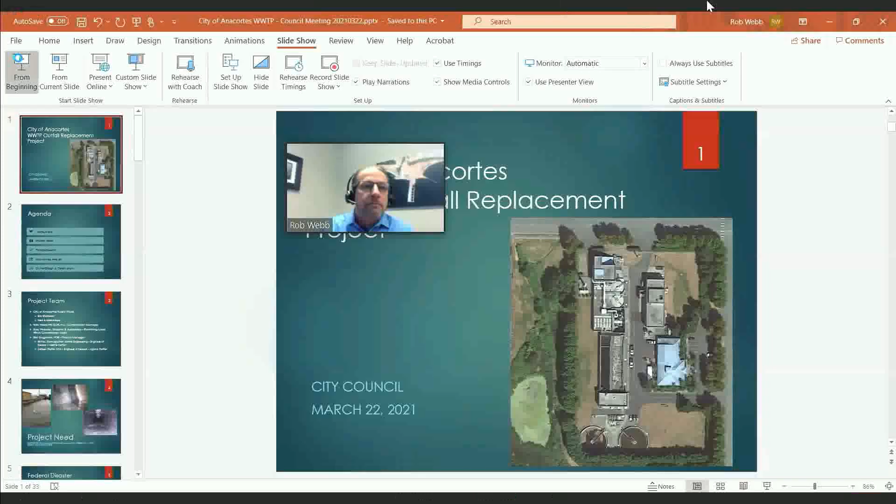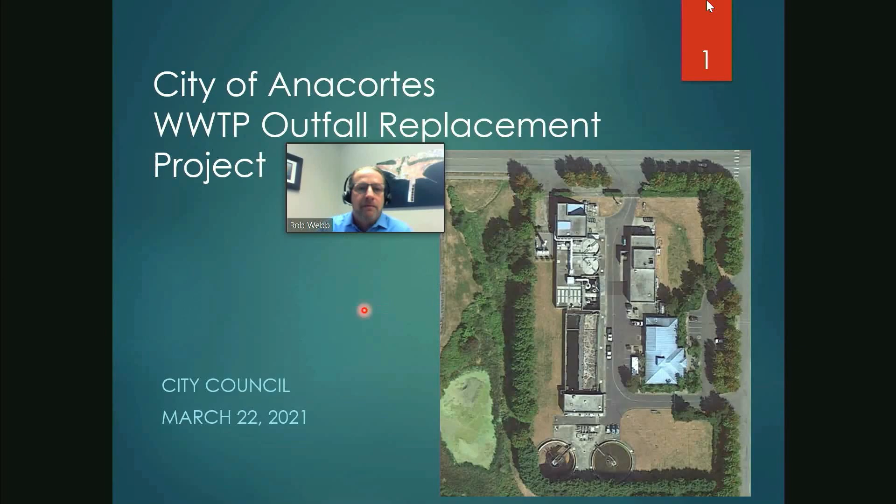Can everybody see my slide okay? Yes. Okay, so this is slide 1, just an overview slide showing the wastewater treatment plant. So, agenda for tonight: go over a bit more introductions of the project team, go into the project need, why we're here, why we're doing this, speak to the federal disaster declaration that overarches the project, go through the alternatives analysis briefly, and then get into some of the particulars of the outfall design and construction.

As far as the project team, you all know Fred and Eric, Rob Webb, and the rest of the city team. That includes Ross Widener of Widener and Associates, doing all the permitting, FEMA coordination, and a large variety of permits for the shoreline demo work. We consistently need a large slew of federal, state, and local permits. Our actual design team is headed up by Eric Bergstrom over at HDR, the project manager, supported by two engineers: Bill Fox from Cosmopolitan Marine Engineering, responsible for the marine portion of the design, and Colleen Patilla at HDR, the engineer of record for the upland portion of the project.

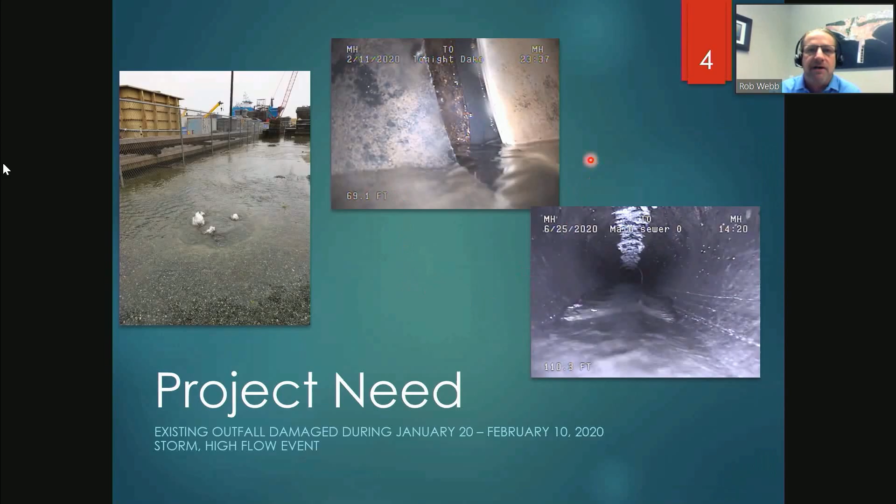In terms of the project need, this is being driven by a high flow storm event back in 2020 that caused water to come up into the streets via the manhole. A subsequent inspection of the existing outfall showed a gap in the outfall pipe and what appeared to be a vertical discontinuity in the invert, or bottom of the pipe, as the little wheeled camera went down the pipeline, dropped suddenly, and continued on. It seems there's damage to the outfall pipe, and so the project begins there, to correct that damage from the high flow event.

This storm event was declared a federal disaster by FEMA, project number 4539DR, affecting various counties within the state of Washington.

That disaster declaration brings in certain federal protocols and opportunities. One is that the project is eligible for FEMA funding, and so far it's been approved for reimbursement of the emergency work, with an initial funding level approved and additional levels pending based on additional project details. Ross Widener is coordinating that.

We also get benefits for permitting, in that some of the activities are already streamlined and pre-negotiated, so we don't have to go through all the various technical details. Those give us significant advantage because they reduce the permitting time and complications we would otherwise encounter.

As part of the project, a full alternatives analysis was conducted by HDR to look at various potential routings of the outfall pipeline. These were rated based on a number of evaluation criteria, one of which was the ability to get the outfall constructed this year in 2021, as opposed to waiting a full year.

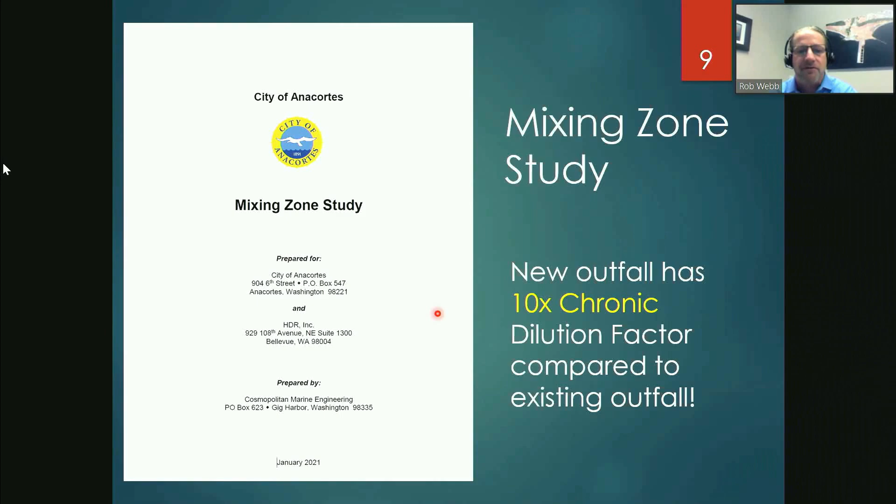That evaluation summary went through the various 5 routing alternatives, looked at the factors I mentioned, and evaluated their potential impacts on the project. We also looked at the length of the outfall, which varies depending on the course, because they all start and end at the same point, but their intermediate routing affects the total length. All of these are constructible, but have various levels of complications. The port has been supportive throughout the entire process, giving us input on how their operations and the outfall might interact now and in the future.

We also looked at costs for construction. When we look at the costs for construction, alternative E is the lowest cost. It also had the lowest number of impacts on that previous table. And so from that, we come out with a preferred alignment E.

It does not require construction on port property. It gives us our highest probability of starting construction in 2021 as we're planning. It avoids that dredge area. It allows cut and cover construction in both the uplands and the marine area, because we did consider tunnel boring, but it was more expensive and more technically difficult than conventional cut and cover for both the uplands and the marine.

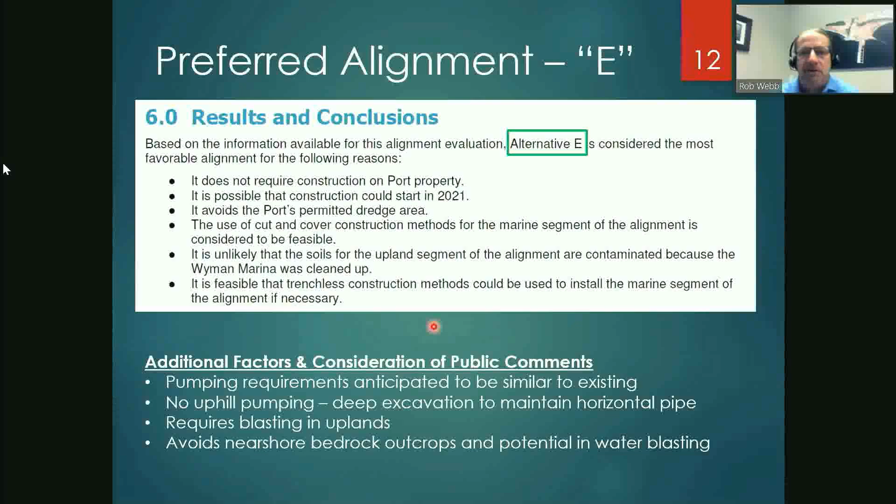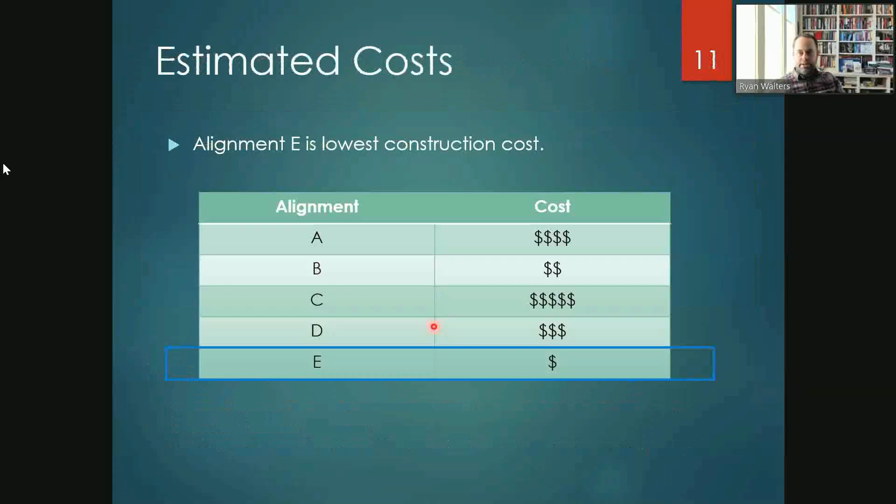Yes, Mr. Walters. Back a couple of slides, the last cell in the table, slide 10, seemed to indicate there was some unresolved question about alternative E. Have we now determined the depth of the rock along the alignment? Yes, sir, we have. We have done a full investigation of that. We are quite comfortable with the depth of the rock along the alignment, and we also have done rock coring to establish the strength of the rock. Okay, thank you. Yes, no worries.

There's a lot on this slide. Is there any other questions?

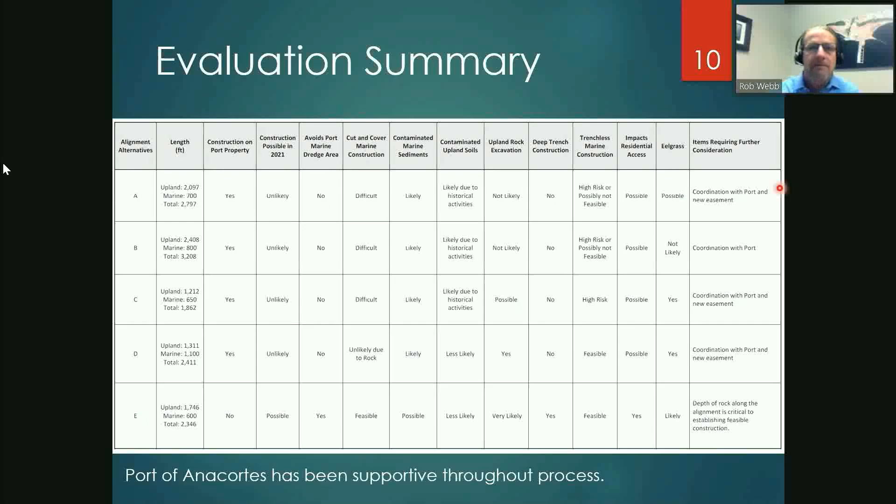As far as pumping requirements, this is for us technical geeks, I just got to put this out there. In terms of our existing outfall, it's a relatively small pipe. It's been repaired, replaced, and other things over time, and as a result it is a rather small diameter pipe, down as small as 18 inches along some of its current alignment. That, as you can imagine, causes restrictions - it's a small straw, if you will.

To get out the full plant capacity, or typical top end that we talk about of 10 million gallons per day, it takes 3 pumps running at that flow with a high tide, pumping against 22 feet of total head. When we go to the new outfall, we're going to a much bigger pipe, so now you're sucking your milk through a much bigger straw - it's much easier to move the fluid, there's much less resistance. So we wind up with a reduced amount of head that we're pressing against, and we should be able to run 2 pumps instead of 3 at the plant. That's because the new outfall, being larger diameter, is more hydraulically efficient. That's my one slide to look like an engineering geek.

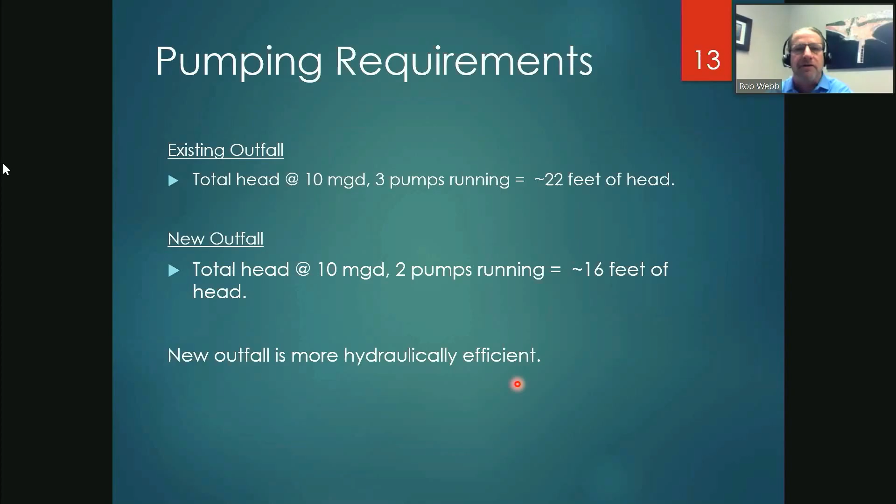In terms of the outfall design and construction itself, there are 3 components or projects that build this up. One is the upland portion of the outfall - it goes from the wastewater treatment plant down through the streets and out to the shoreline at the end of U Avenue, where we will then transition to the marine portion that goes from the shoreline out to the end of the outfall in Guemes Channel. There's a third, corresponding project that's not part of this, which is to then, after this outfall is in place and operational, abandon and remove the existing outfall.

When we talk about the marine portion, I'm going to go from offshore to onshore, because that also fits with our current construction and contracting schedule. The in-water portion is more schedule dependent with that limited in-water window. We also have a limited number of marine contractors to perform this work, so we wanted to get the marine portion moving as quickly as we could, to get contractors interested and have a good slate of them provide good quality and value to the city when we get to construction.

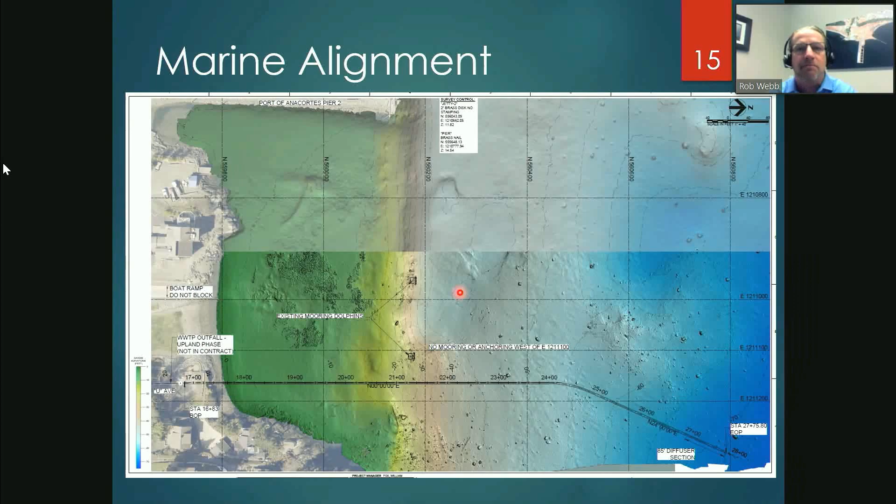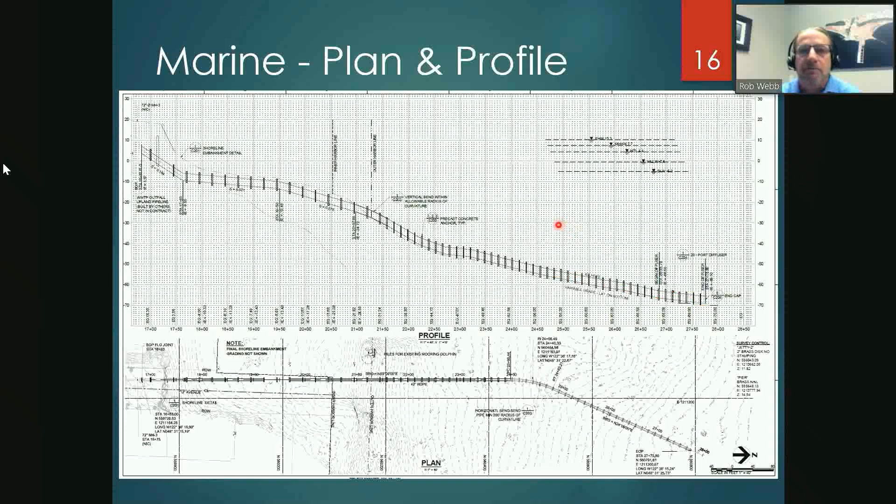A participant asked for the depth at the start on the left side and where it ends on the right side of the chart. The speaker explained: this datum is the North American vertical datum, with zero marked here, and the tide range shown nearby. At the far end, we're down around negative 60 feet below zero, so about 60 feet of water depth. On the left-hand side, we're above sea level, about elevation plus 18 at the top of the ground. Our pipe is 4-foot diameter, with its bottom around elevation 4 and top around elevation 8.

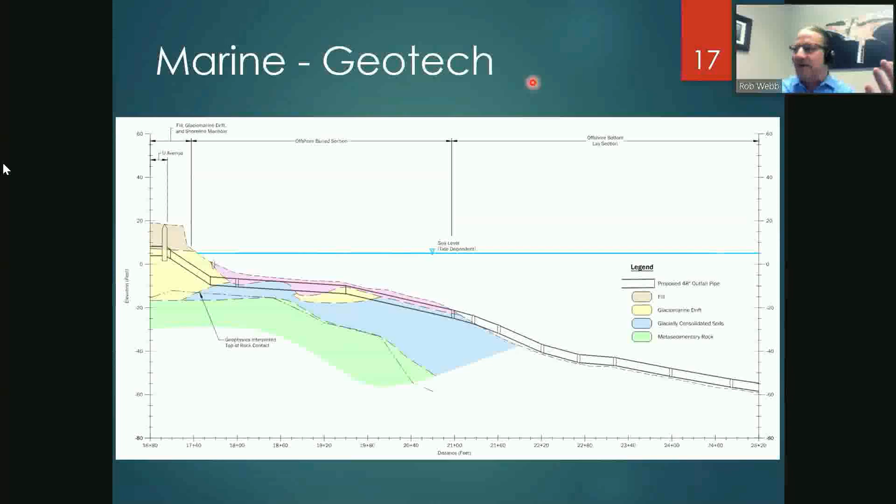For the marine construction, we're talking floating plant, floating cranes, tugboats, divers, and support equipment. We're putting in about 1,000 lineal feet of 42-inch diameter HDPE, high density polyethylene, plastic pipe. It will be held in place by concrete anchors, about 7,600 pounds apiece, with 64 of them attached to the pipe. The pipe will be trucked in near the site, contractor's choice, then fused together - basically melted and stuck together. The anchors, which come in two pieces, will be clamped onto the pipe, all done at an off-site location.

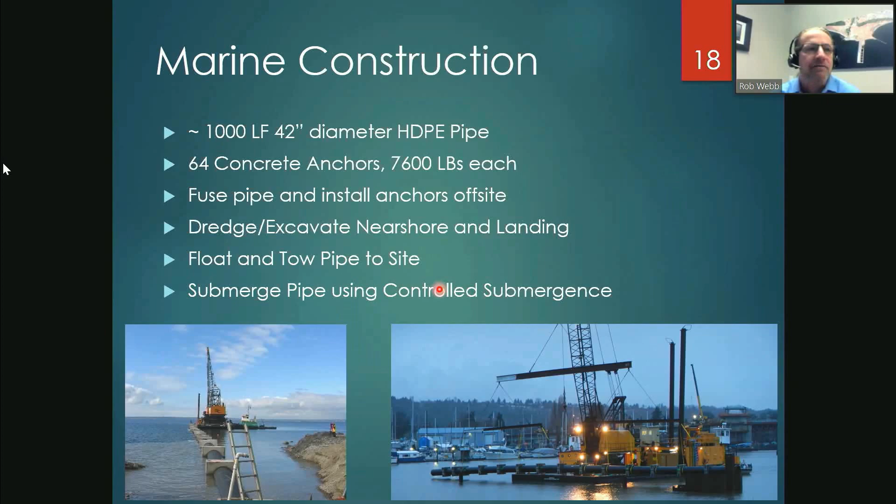The contractor will simultaneously be dredging and excavating the nearshore area and the landing - the nearshore area is where the pipe gets buried, and the landing is where it comes up onto shore. Once that's ready, they'll float and tow the pipe from where it was assembled over to the site. Once there, they'll submerge it using a technique called controlled submergence, pumping water into one end of the pipe, bleeding air out the other, and sequentially sinking the pipe along its length.

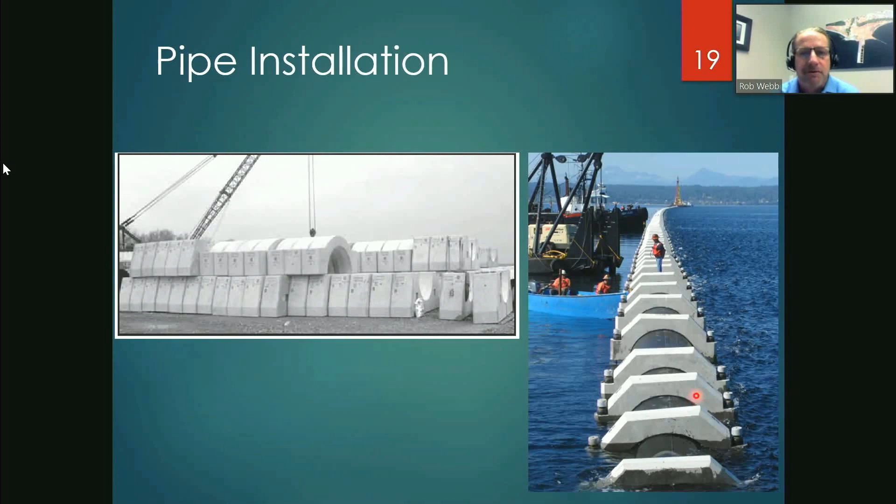In the near shore area, the contractor will come in and put in steel sheet pile shoring to create a landing area where they can dredge out in between it and have a notch coming into the upland area to lay the pipe. They will put in the sheet pile, do the dredging, and then tow that assembled pipe, with all its weights in place, out to the site.

In terms of durations, pipe preparation will all be done off-site, and that'll take some time, as will the precasting. But in terms of actual work the public will see, we're looking at about 2 weeks for upland site preparation to get access ready, and 2 to 3 weeks of work to get the marine portion ready. Then, when the pipeline is ready, we'll tow it over, and in one day it'll go from floating to sinking, and its installation will be done. Then we'll remove the sheet piling and do some backfilling on top of the pipe in the marine area, which is probably another week. So the actual physical construction of the marine piece, in the public eye, is relatively short.

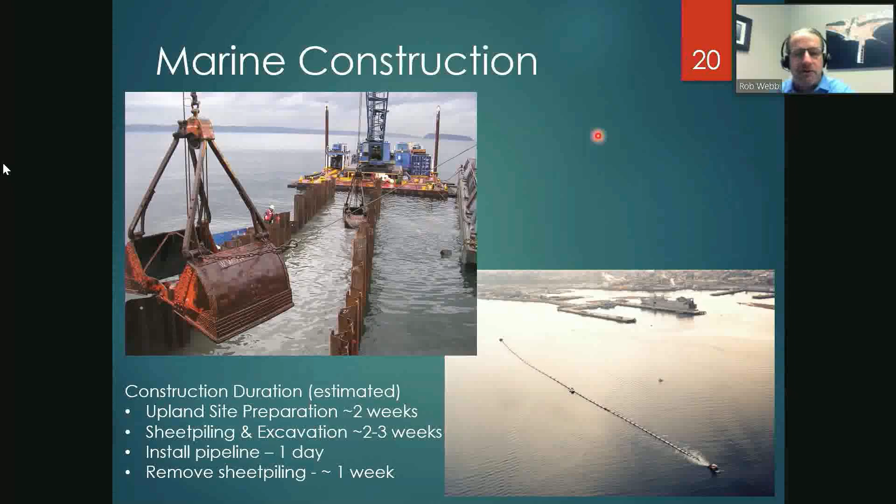The way this works is when the pipeline initially comes in and is floating, it's full of air. The contractor will then hook their crane onto a piece of it some distance from shore and lift it up a little bit to create a portion there that the water cannot get beyond. They then start pumping water into the inshore section, which floods the area between the lifted section and the shoreline, putting weight in the pipe. That then causes the pipe to sink to the bottom.

As they continue pumping water in and venting air out, the pipe, just like a rope as you're laying it down on the floor, will gradually sink down to the bottom along its full length. Then they pull on it with tugboats, both at the end and where we want the curve, to put it down in its proper place on the bottom.

This process can be reversed at any time. Should a problem occur, we just reverse it - let the water come out and pump air back in. We can float the pipeline back up and adjust it if we need to. If we get halfway through and a significant unforeseen storm comes up, it can be managed as necessary.

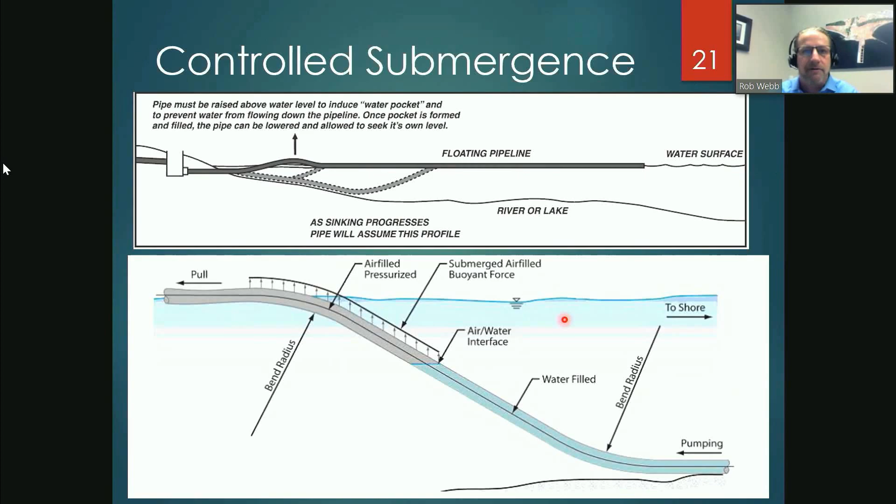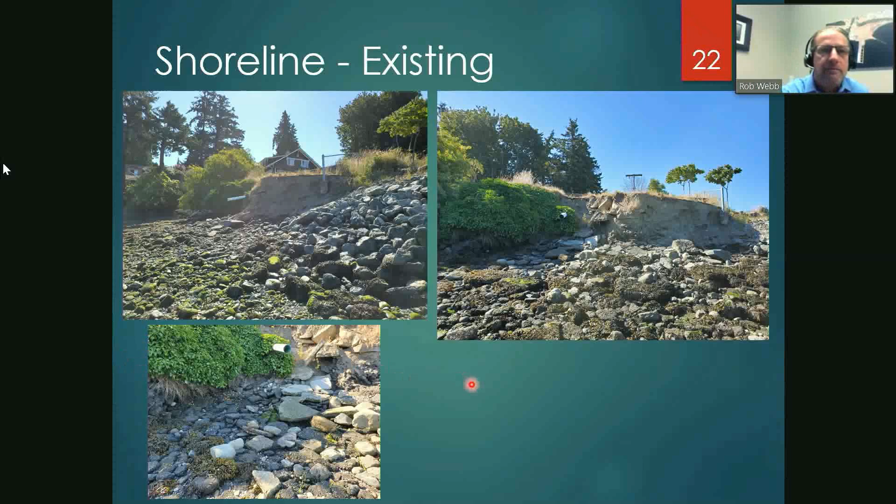Right now, as I mentioned, we are in our contracting mode for the marine work. We're finalizing our 100% design, but due to the limited number of contractors and the limited window, we wanted to get the project out for the contractors to be aware of and get it on their calendar.

Our objectives in the contracting: get the qualified contractor that provides the best value to the city. We're very cognizant of making best use of city funds throughout this process. Want to make sure we have a contractor that is aware and brings that to the table. The RCW that you see here gives us the ability to make this type of selection and do more of a qualification or other type of selection as opposed to low bid alone.

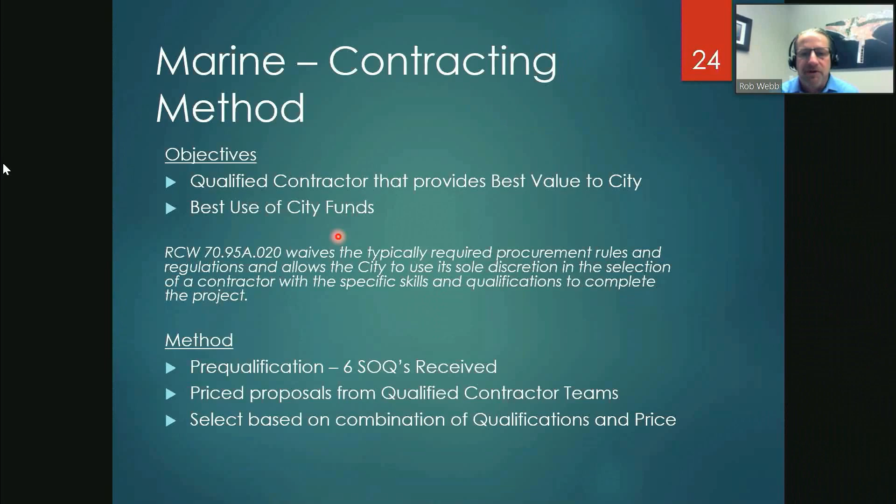This being complex work, technically, permit-wise, environmentally, we really want to make sure we bring the right team to the table to do the work successfully.

Unless anybody had any questions on the marine section that you wanted to jump into now, I'll start talking about the upland alignment and its construction.

So again, when I talk about the uplands, I'm talking roughly about the first 1,700 lineal feet or so of the project, coming from the wastewater treatment plant over and out to the shoreline there. Again, about station 17 plus 0 is where we make the handoff from upland to marine.

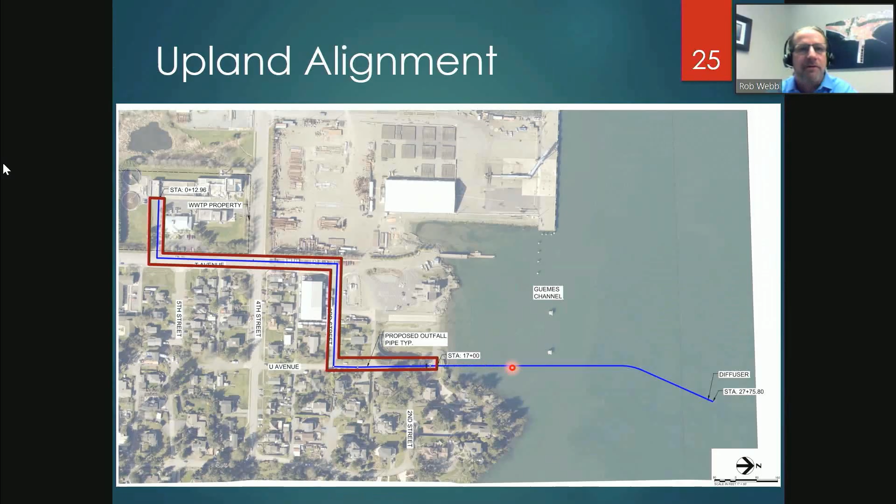When we talk about the upland construction, we've got that 1,700 lineal feet. Here we're using a 48-inch diameter fiberglass reinforced pipe. It's lighter than concrete, more chemically resistant, corrosion resistant, just physically stable over time, lighter. And so that's the pipe choice for the uplands.

To accommodate the construction, 3 manholes will be installed. As I said, this is a cut and cover, so we're digging a trench on the order of 15 to 30 feet deep. We do have about 400 lineal feet of that excavation that will be in rock that will require blasting, but not unheard of in construction, or there in Anacortes itself for construction.

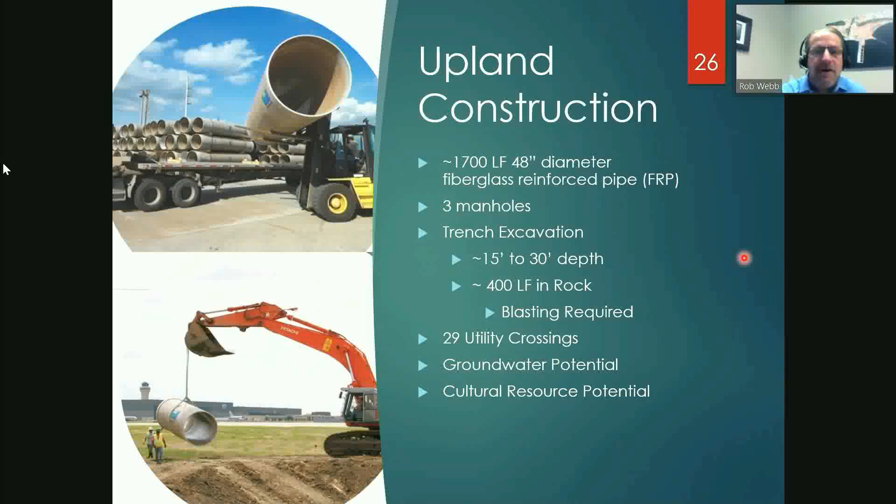Along that alignment, we have 29 known utility crossings of every flavor: water, sewer, power, phone, fiber, you name it, we've got at least one of them. We have a potential for groundwater that we are aware of. There is a wetland behind the wastewater treatment plant, and there is an active dewatering system at the wastewater treatment plant, so we have information on that and are preparing for it. And we do always have the potential for cultural resources, so appropriate monitoring plans are in place for that during the work.

As I mentioned, the uplands is going to be a cut and cover trench, so just a couple of pictures here showing that. We anticipate the contractor will use trench boxes, although they could use an alternate shoring system that is a contractor design. You can see here a typical trench box - this is 2 of them stacked on top of each other. You can stack more of them as necessary to accommodate depth. Those can be put into the excavation as necessary for stabilization and safe work practices.

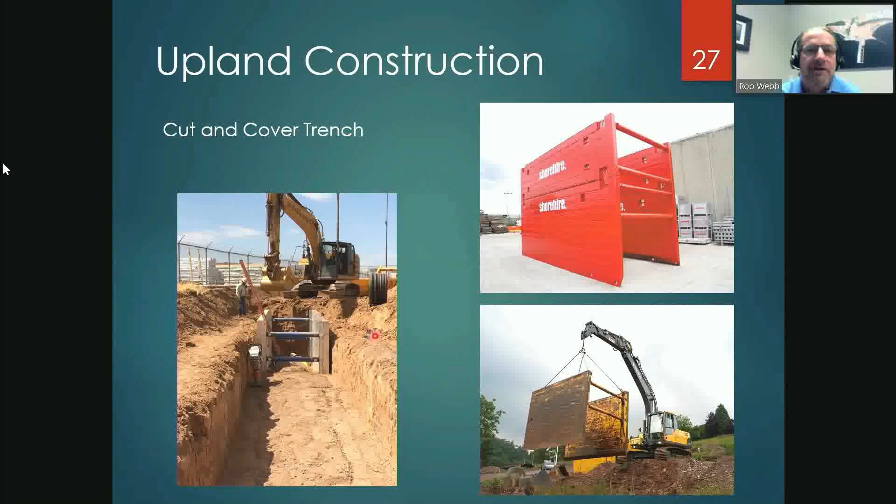Here on the left, you can see an example of that in practice. There's the trench boxes, workers in there making connections between the various segments of pipe. And here you can see the contractor did what's called benching down a little bit, where they excavated a bit on the shoulders of the planned utility trench, so the trench itself wasn't so deep.

Here is our geotech information. Again, we've done considerable investigations on this. Geoengineers is the geotechnical engineer on the project, with considerable experience there in Anacortes. One of the most important factors in selection of a geotechnical engineer is their local knowledge.

And so here is the results of their site investigation. If you can't see it all, the green is rock. Everything that's not green is a fill or a soil material of some type. The brownish color is fill material that is identified as being brought in. The yellow and the blue are glacially deposited and overridden materials, so again, a very dense material is expected. And then here in the green section, you can see where we would be doing the blasting to install the trench.

I have a question about blasting. How deep is that rock from the top of the highest point down to the pipe itself? The ground surface here is about elevation 35, and the bottom of the pipe is around elevation 5, so this is about a 30-foot deep excavation.

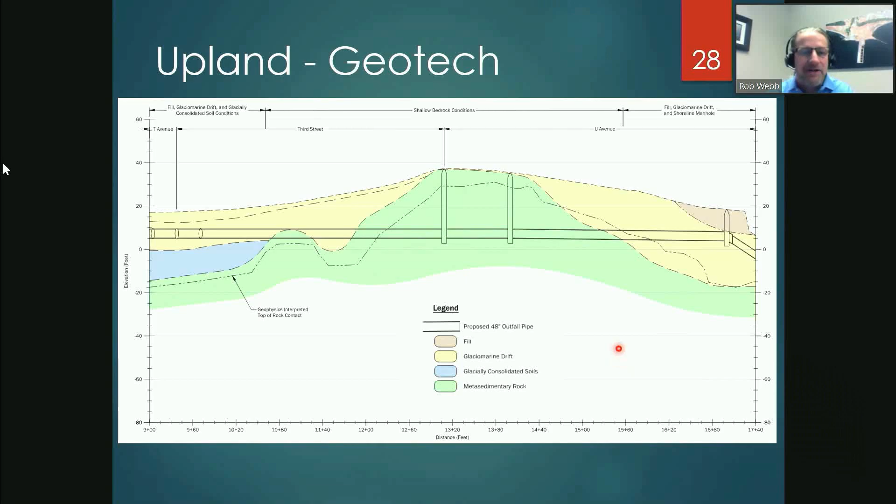Okay, that is a deep hole right there, but certainly not out of the ordinary for this type of work. So, blasting.

Figuring that was going to be a big question, and that we've had a number of public concerns about it already, we've done extensive investigations out there. The rock has been cored, tested, and evaluated for its compressive strength, fractures, etc. We looked at the potential of using a direct bore, a Big Bertha, Elon Musk boring type thing, but blasting and excavation would still be required right at that manhole you mentioned, because in order to make the turn there we would have to bore the pipeline in two different directions. So we would need to dig that hole to start the boring in the two directions, meaning we'd have both blasting and boring if we did that. The direct excavation was considered to be a cheaper, less risky operation.

The blasters do have a large number of protocols they will put in place, including public notification and pre and post property surveys. They have a very prescribed blasting plan based upon the properties at the site and their desired product of the blasting, in terms of how much rock they're removing and what size they're trying to make it. They will also put down what are called blasting mats before any of the charges are detonated.

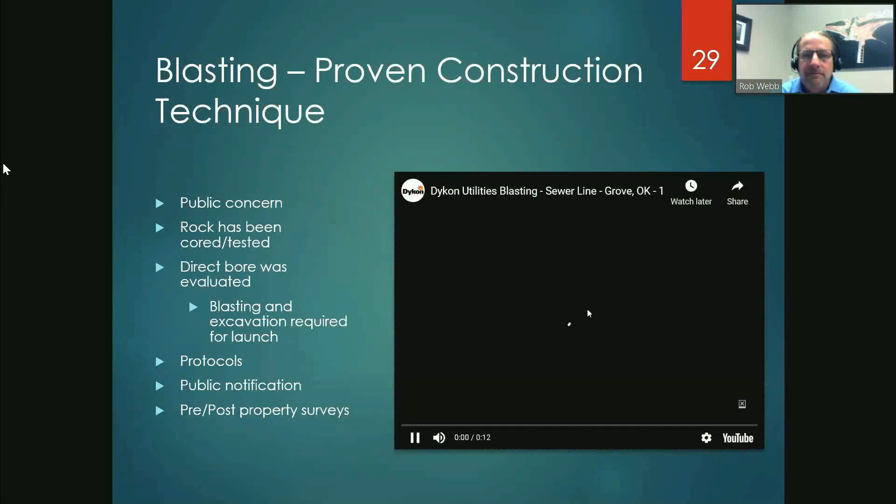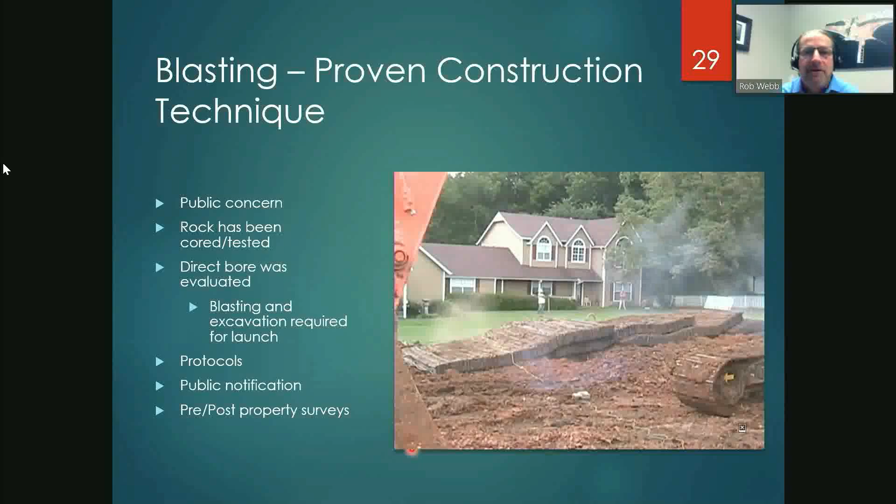And again, that's much more dramatic than anything we are currently anticipating. Especially once we get below the first lift, if you will, and they're down deeper into the hole, we don't really expect almost any observable impacts at all.

Mayor Gear? Yes, Ms. Moulton. So to continue on this train of thought, how could we estimate how deep that video we just saw was? I mean, there will be multiple blasts, right, as they go down. Is that correct?

I'm sorry, were you addressing me or the mayor? I'm sorry, oh sorry, I just was asking. Sorry, it was council. I don't know how many, I wasn't going to speak because it wasn't my turn. Your turn, Rob, trust me. I'll ask Mr. Webb then. All right.

So this will be repeated? Because you have to go down 30 feet. Correct, ma'am, so it'll be multiple blasts all the way down to 30 feet, taken off in lifts determined by the blaster based on not wanting to use too big of charges. They could take all 30 feet at once, but that would be a bigger explosion than any of us want. They also use time series charges, so it's not just one big boom, but a series of staggered small charges that create that cascade effect you just saw. That will be developed by the blaster in accordance with the rock material and limiting the propagation force outward from the blasting point. It might be 4, 5, 6 feet taken off in a lift using a minimal charge to get the material out. We don't want to blast any more than we need to because that creates additional material.

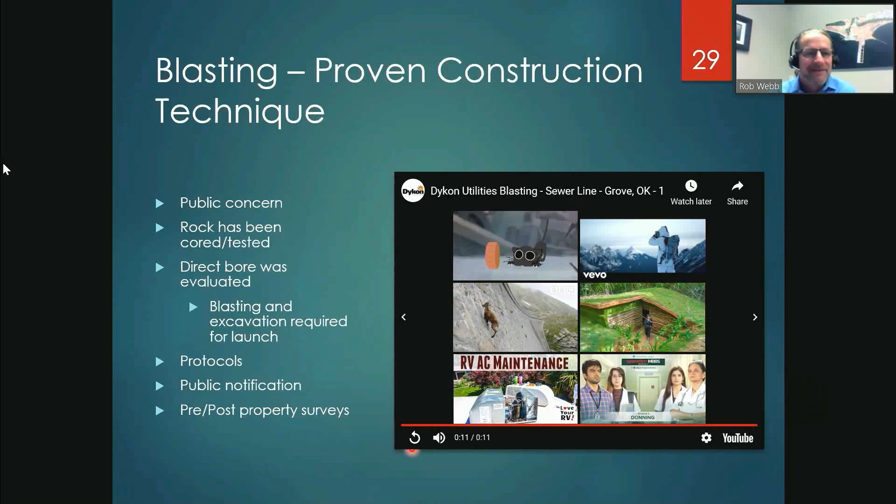Let me get beyond that. He likes to keep playing again and again.

So as we talk about the upland construction, we've had considerable discussions amongst the project team and with Fred and Eric about how to reduce impacts to the public as practicable. We understand working through people's neighborhoods and everything else here, and there has been public outreach that has gone on so far.

We will be putting together a very detailed traffic control plan to manage the work. There's a lot of materials moving in and out as we're excavating that trench, taking excavated material away, bringing in pipe and backfill materials. We have a lot of construction traffic that will need to be brought through, so we're working on a detailed traffic control plan that allows the work to efficiently happen and also maintain safe access to residences throughout. We're looking at an incentivized contract to motivate the contractor to get areas completed as quickly as possible to reduce the duration of impacts.

Some other benefits - this has impacts, but we like to think there's long-term benefits. The city's looking at undergrounding utilities, overhead wires along the alignment as practicable, to get those out of the way. We're going to increase public access at the end of U Avenue, improving what is just a paved area with ecology blocks. That work is not FEMA funded - work beyond restoration to the original would be beyond FEMA funding. Along the route through the city, we're looking at improving streets, curbs, sidewalks, pedestrian access, since some areas don't currently have curbside or a sidewalk.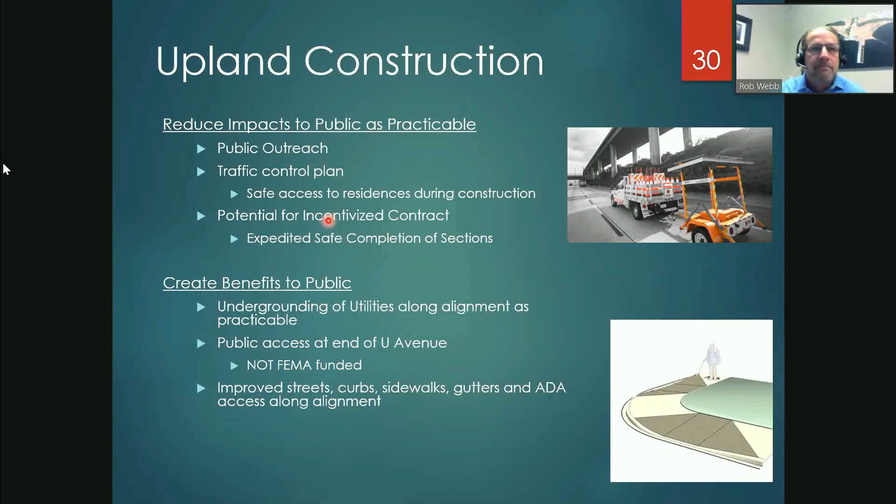At the end of U Avenue, this is just conceptual, currently still being developed. But right now, as I previously showed, it's just this asphalt paved street end with ecology blocks. It's directly next to the Ports Wyman's habitat area and a little public walkway along the left of the photo. So we're looking at putting in a public access area here.

This is the street down here. Currently we have a drive configured to provide long-term access to the residences. This has been specifically developed to limit the public from going in there. It's midway through a curve, so if you're not really looking for it, you won't even notice it. It's got rather restricted access to come in and out, with signage to discourage the public from wanting to drive in.

As the public walks in, it would open up to the north, encouraging them into this open space area. There's a walkway through it to come out to an observation area. That drive then comes in and restricts down again with native vegetation to discourage the public from going further back into the residences.

We have signage there to discourage that. And then we have a couple of parking spaces we're looking at here out on the road frontage itself that connect to the walkway and give public access to that street end.

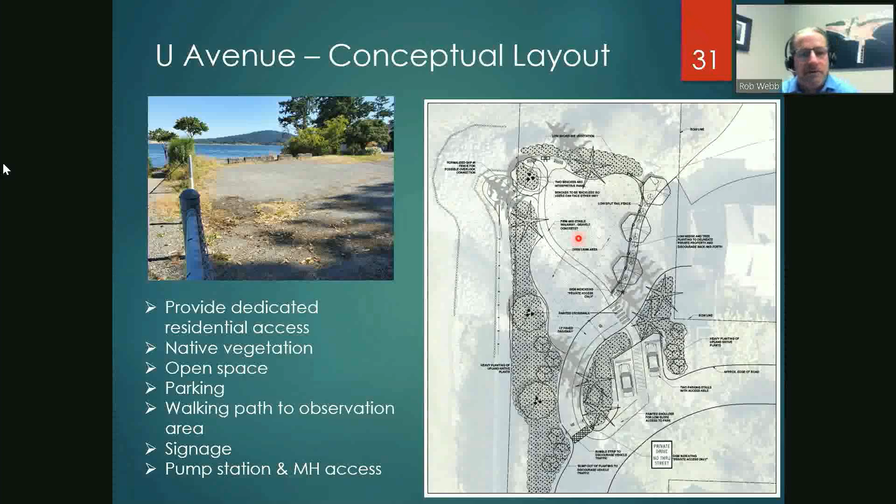So in summary, we did our alternatives analysis. We looked at 5 potential alignments, A through E. E is our preferred and planned alignment. We're well underway on our permitting.

That's a long journey, but we're making good progress. We're targeting construction in 2021, hopefully starting the marine work in late summer, contractor getting the pipe, getting it fused together, and then looking to do that installation at the site late September, October if possible. That's our preferred window for tides, weather, etc.

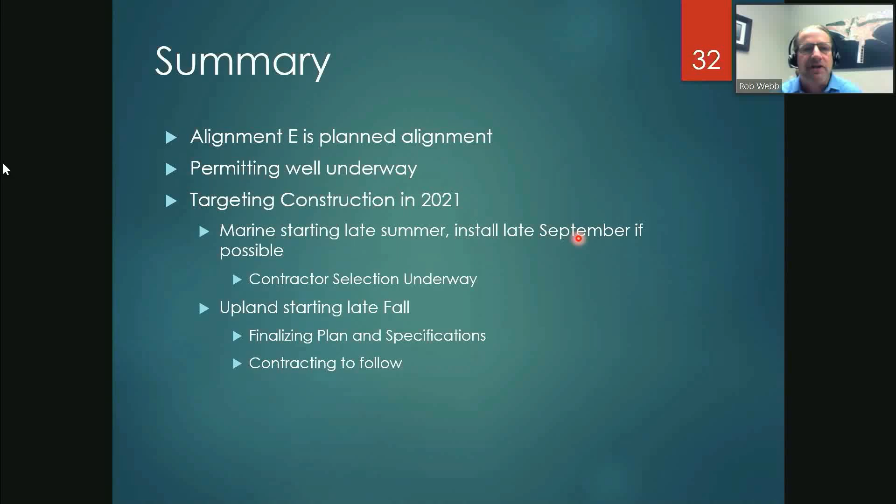The upland work would be starting later this fall. We're currently still finalizing our plans and specifications for that, which would then allow us to move into the contracting phase for the upland portion. And with that, I've reached the end of what I have to say, and I'm happy to answer any questions.

Council, we do have one member of the audience that would like to ask a question. Can I go with that person first and then refer to you? Okay, John Wilkinson, you have your hand up. Matt, can you help him in? Hello, I've tried to. Yeah, welcome, John.

Maybe you can't see my picture, I'm not sure why. I can't, but I can hear your voice.

Based on the neighborhood meeting which occurred on March 9th, after talking with neighbors, we put together the summary pros and cons that we'd submitted to council. At the March 9th meeting itself, the question came up about why come up U, which is basically in people's front yards, versus going straight down T, which I guess was alternative D in Mr. Webb's presentation. And alternative D, I'm not sure why it would cost more than E, because it's shorter and flatter on the uplands, at least than alternative E.

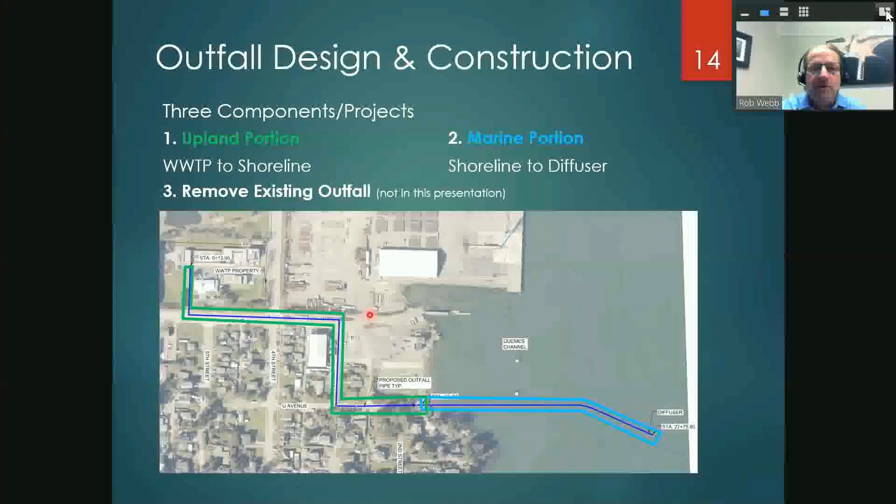The fact that D goes through the port's deep dredge area means we would have to go very, very deep with our pipe to get underneath that, compared to our other routing that avoids it. So we have much deeper, much greater excavation required for D. We have the eelgrass bed impacts, and then we have bedrock right along the shoreline along alternative D.

You can see those outcroppings underneath the restaurant out there. The concern is that blasting in the marine environment would be much more complex, costly, and difficult to permit than the blasting required for alternative E, which is primarily along this stretch of Third and U, basically centered on this turn at Third and U. This is where the deeper manhole is, compared to regular construction — though it's not all that deep, so I shouldn't say that.

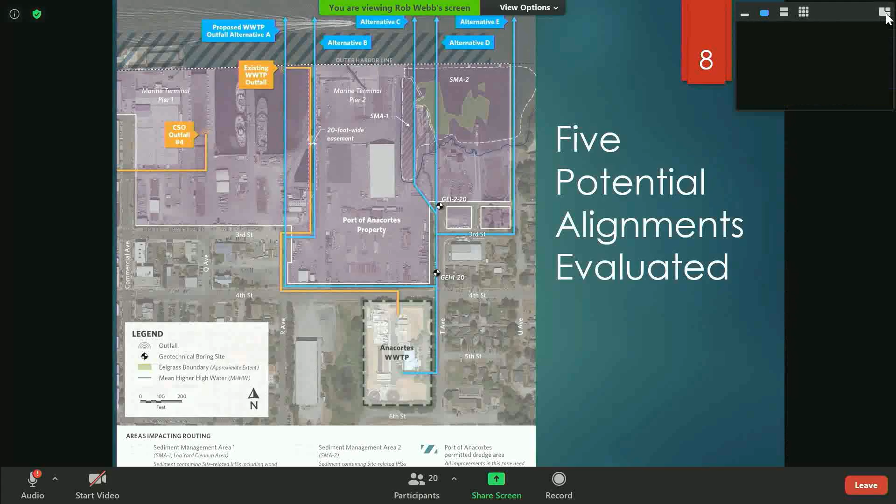The second question is the period of time the neighborhood would be impacted. I don't have a definitive answer on that right now, as we are still working with potential blasters and contractors in discussions, including the idea of an incentivized contract to try and limit that. We recognize the access limitations in this area and are looking at ways to limit the contractor's impacts so that access is preserved to the extent practicable, and to limit our impacts to the public. But until we get deeper into the actual contractor discussions, the duration is a little hard to peg down.

Okay, thank you. Additional questions, council? Mayor Gere, Mr. Walters: just out of curiosity, why does the pipe start at a different location at the wastewater treatment plant than the existing outfall pipe?

They tie together back here. This is just showing where the pipe comes out and enters the city right of way, and where this one connects. The existing pipe comes out of the pump house and goes this way. We're going to tie into it right here, so they basically do start at the same spot. That is correct, yes. Good question, though - I never thought about it before, but looking at the graphic, it is confusing.

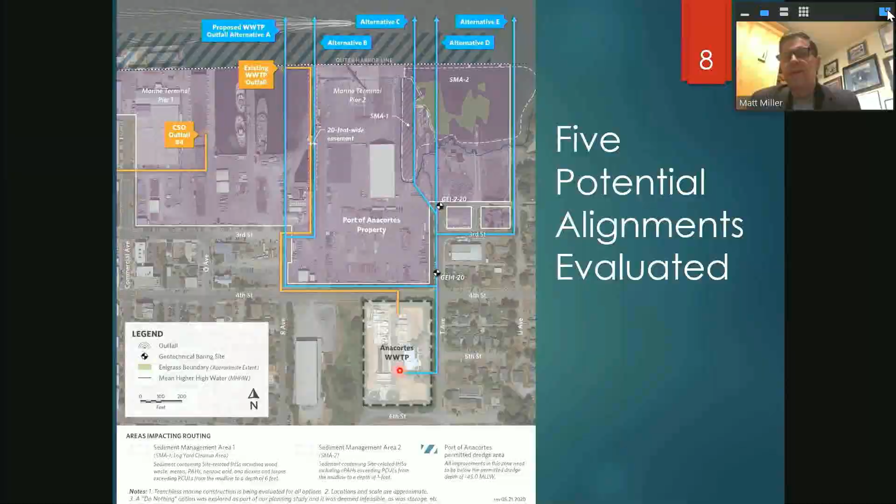Mayor: Yes, Mr. Miller. Just a comment - great presentation, first of all, really gives a clear picture of what we're trying to do here. But with the alternative E outfall, I think it's a huge thing to not be in the dredging area. I also think it's not risk-free, because perfect dredging doesn't always happen, but I do think it's definitely low risk long-term. You can't really put a price on that, having it outside the dredging area to make sure that deep water port is still functional.

Mayor: Yes, Mr. Young. Just also a comment - in the meetings we've had prior to this, it's something we really have to do, I think we all agree on that. I think the real challenge was how do we have greater control about the people and things we need to deal with in order to make this happen. One of the reasons this path came forward was because it minimized the interactions between not only the port and the city, even though we are collaborating and working together, but it really minimized all the potential things that might impact this project. So after looking at everything, I am okay with moving forward with this.

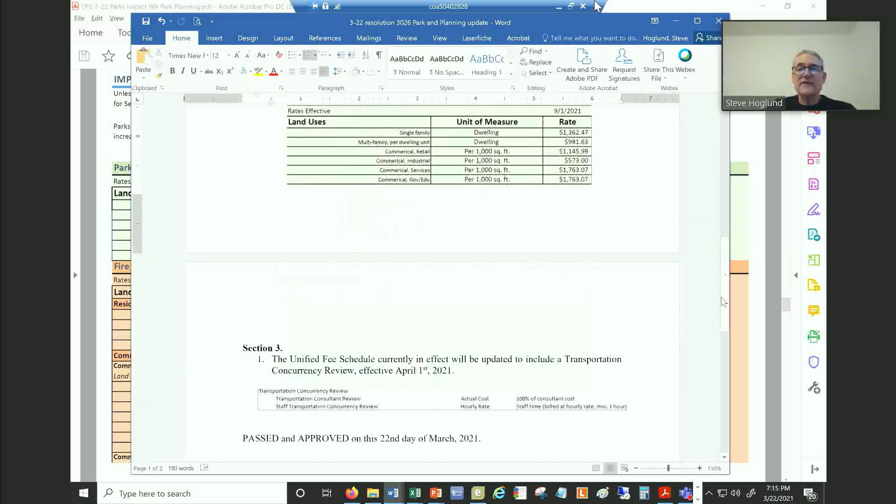Additionally, we have the parks impact fees that came to council earlier this month as well. I did want to point out that we have the effective date of September 1st here, and that's reflected on the unified fee schedule as well. The resolution in your packet had an error — it's listed as January 1st, 2021 — so I will update that with this corrected version for signature. The final thing being added to the unified fee schedule is the cost for transportation concurrency review. This is already in effect; it's a cost the planning department incurs and passes on to the customer. We just want to add it to the fee schedule for transparency purposes.

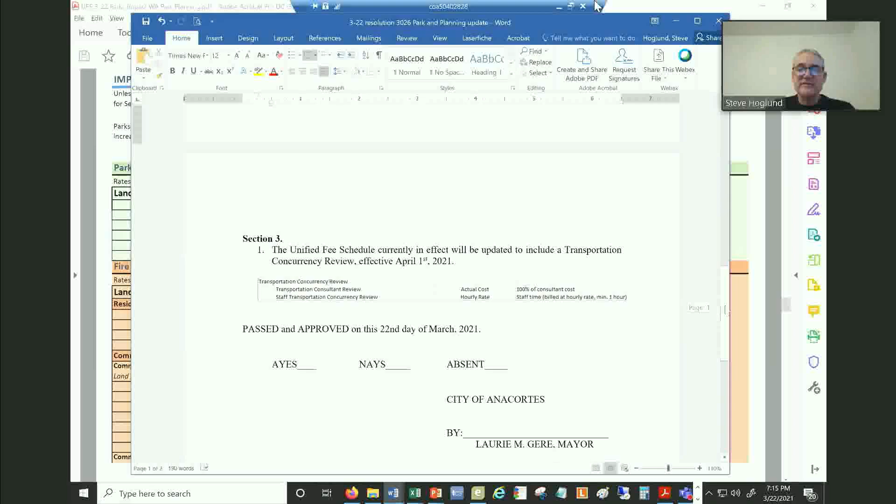So that's the three items being updated and added to the fee schedule. This is the full fee schedule itself. On page 13, we have the impact fees for the parks with the September 1st effective date. And at the very bottom of the fee schedule are the Washington Park fees that have been added with an effective date of May 1st. I'll be happy to answer any questions council may have.

Mayor Gere, Mr. Walters: we already adopted the parks impact fees by ordinance, right? That's correct — this is just incorporating those into the fee schedule. You're right. Okay, good.

Okay, any other discussion? Questions, action? Mayor Gere, Mr. Young: I move to approve Resolution 3026, updating the unified fee schedule.

Thank you. Second. A motion by Mr. Young, a second by Mr. McDougall. Is there any discussion? Ms. Hunt, would you take the vote? Mr. Young, yes. Mr. Walters, yes. Ms. Moulton, yes. Mr. McDougall, yes. Mr. Miller, yes. Mr. Carter, yes. Motion carries. Thank you, Marcia.